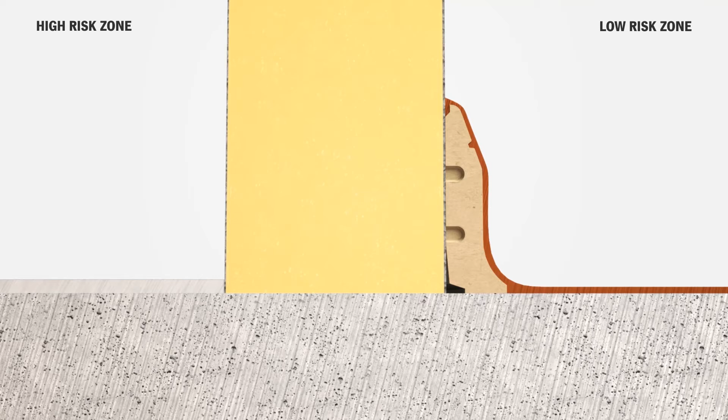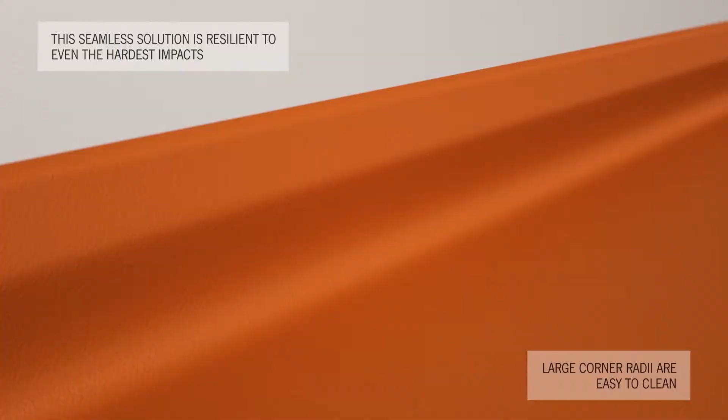Hi, I'm Jakub, and I am here today to tell you about our new product range of wall protection, ACO Kerbs. ACO Kerbs has three main functions: protects walls from impacts caused by machinery and other transport systems, eliminates water ingress into walls and leakage into other processing areas, and thanks to their curved design, prevents the accumulation of dirt and enables easy cleaning. ACO offers two versions of curbs: polymer concrete curbs and stainless steel curbs.

This is ACO polymer concrete kerb used with floor finish, and this is ACO kerb polymer concrete plain used with smooth gel coat. Floor finish and smooth gel coat create a uniform connection between the curb and the floor to ensure optimum hygienic conditions in accordance with EHEDG guidelines. These curbs can accommodate even the most complex room design. ACO kerb polymer concrete is the ideal solution for new build and refurbishment projects with resin flooring.

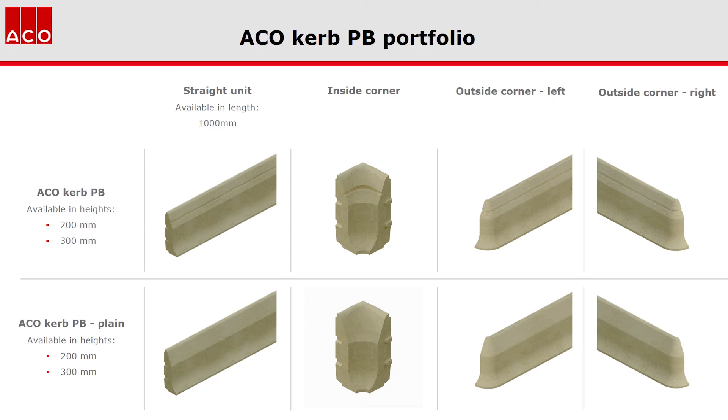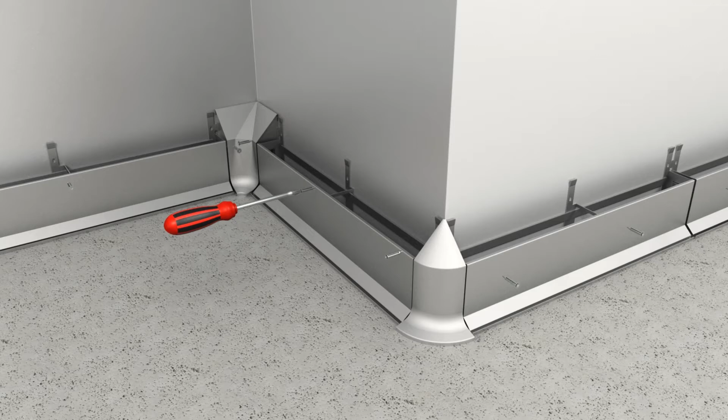The stainless steel variant of ACO kerbs can be designed to suit any building layout. It's made from 1.5 mm thick plate of stainless steel, which is welded on site to ensure the integrity of the whole curb system. Stainless steel curbs are filled with concrete, which makes it a very durable solution, resistant to the strongest impacts. Hygienic design is applied along the entire length of the curb, including internal and external corners, to create smooth corners which are easier to clean.

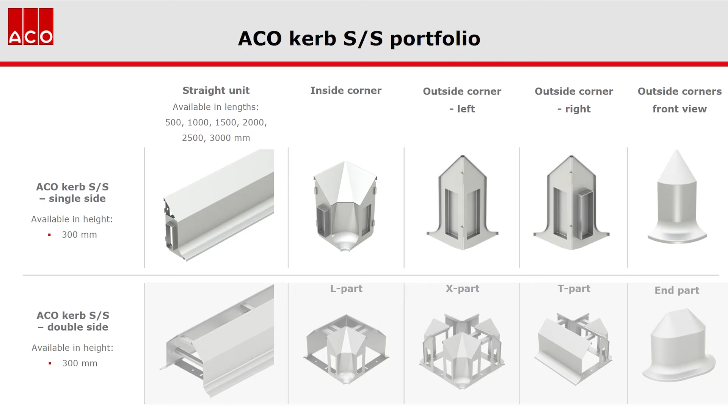ACO kerb single side is suitable for new build and refurbishment projects with resin or tiled flooring which require curbs to be installed onto an existing wall. ACO kerb double side is suitable just for new build projects with resin or tiled flooring. The wall is installed on top of the curb.

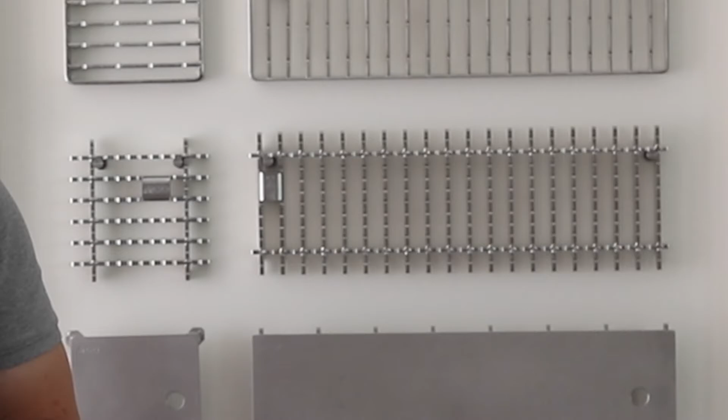Hi, my name is Stanislav Tekal, and I'm a product manager responsible for ACO industrial floor drainage. Today I'm talking about new additions to our gratings portfolio. The highlight is the new ACO frameless ladder grating. It's an exceptional solution which combines open-sided design together with high slip resistance. The open-sided design eliminates the accumulation of debris between drainage channels and grating frames. The top surface has a new design which provides slip resistance to classification R11 according to DIN 51130.

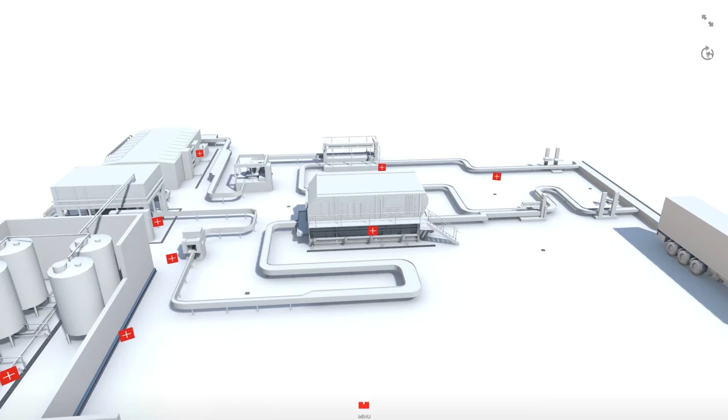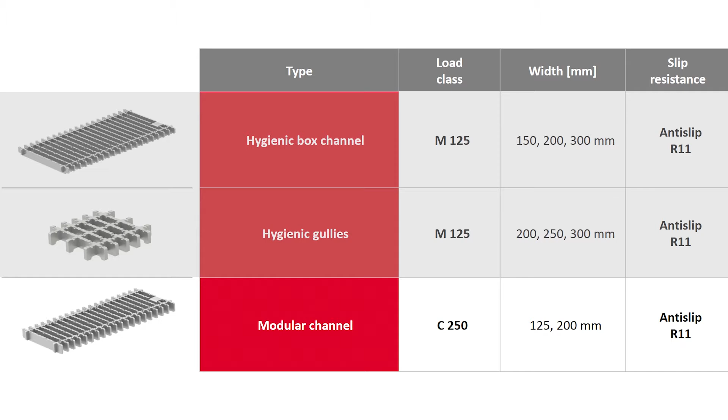Target applications include the beverage and dairy industries and production areas where glass shards may be present, and there is a risk of blockage occurring between the grating frame and the channel edge. The ACO frameless ladder grating allows solid waste to easily enter the drain and is a hygienic and easily cleanable grating solution. We offer widths up to 300mm with anti-slip R11 and load classes M125 according to EN 1253 and C250 according to EN 1433.

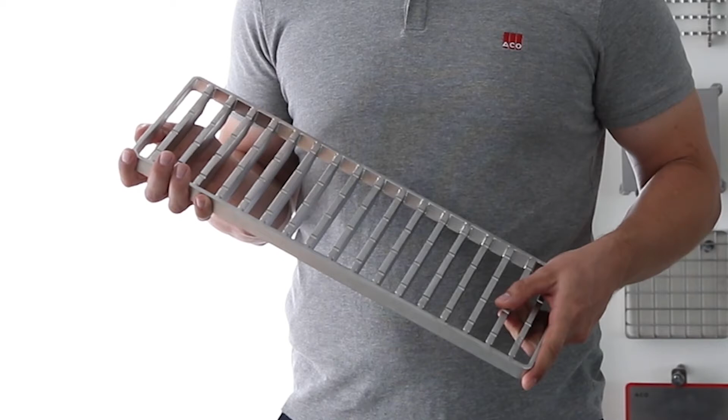Another addition to the ACO grating portfolio is the P400 ladder grating. It's designed for use in areas where heavy machinery is used, including industrial facilities, storage areas, and warehouses. It's also ideal for use in hygienic zones which experience occasional heavy traffic. For example, once a year the gearbox of a large mixer has to be changed, and a big forklift has to pass back and forth, which a standard grating design couldn't cope with. P400 is a durable and robust grating for hygienically designed channels up to 300mm width.

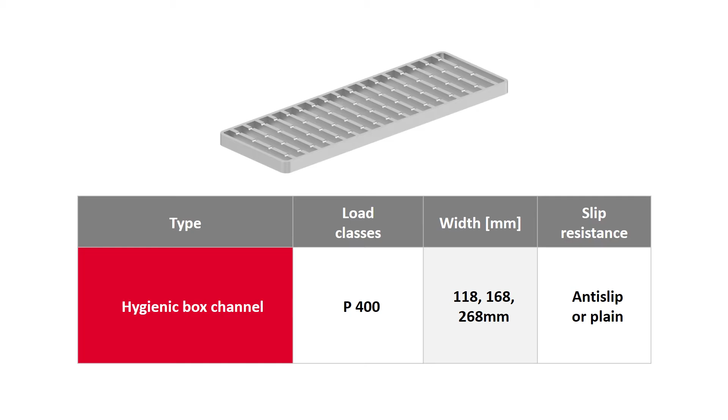P400 ladder grating is not on stock. It's available via ACO Configurator - see the standard article section of the gratings configurator. For detailed information, check our website acobuildingdrainage.com. Thank you for watching.

Thank you, Stanislav. I will kick off the questions with a question: can you please share with us the benefits that the ACO frameless grating has in comparison to the current cast stainless steel solution we have?

Well, maybe the first thing I would like to mention is that the frameless grating is really the flagship currently of our gratings portfolio. A lot of people would like to know what is the benefit over the cast grating. The biggest benefit is probably the surface roughness, because if you compare any cast grating with our frameless grating, it's much different because of the production technology. During casting, porosity is introduced, while if you use just the metal bars, you don't have such porosity, and it's dramatically different. So this is the basic difference and the biggest advantage.

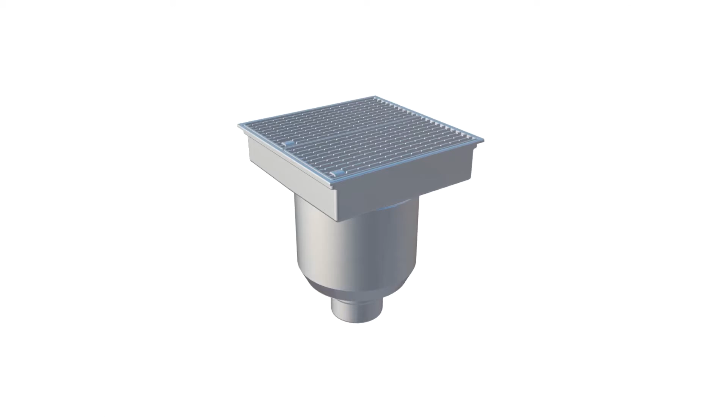Firstly, I'll talk about our new high-capacity gully. The new gully is designed to handle significantly higher flow rates than our existing product portfolio. This solution is perfect for use in breweries, soft drinks manufacturing facilities, and any application processing high volumes of water.

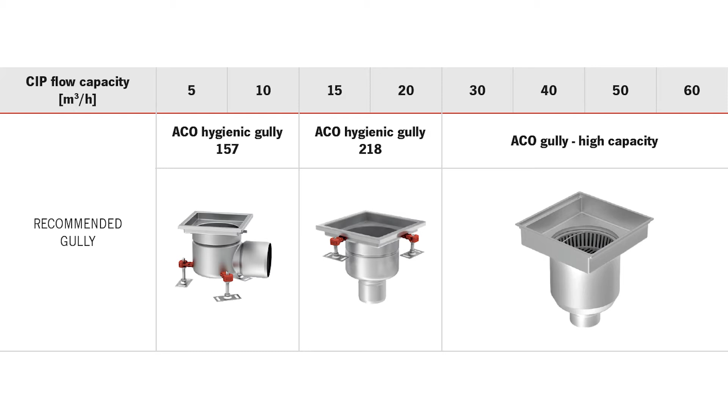High-capacity gully is designed and evaluated for flow rates higher than 20 cubic meters per hour, and it's designed in accordance with our hygienic design best practices.

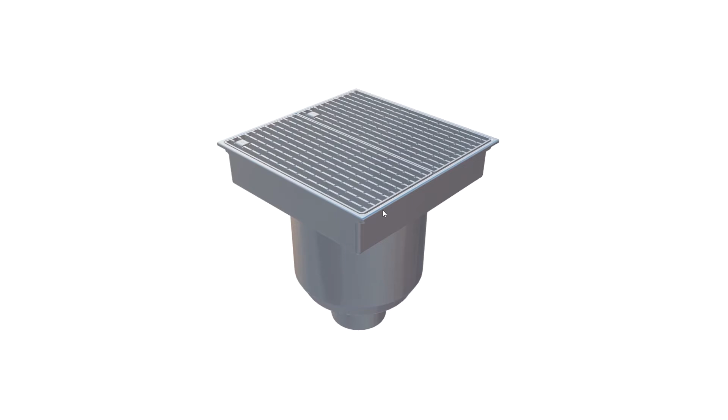In the ACO high-capacity gully range, standard items comprise a fixed height gully with a body diameter of 500 millimeters and a hygienically designed gully top 600 by 600 millimeters, 200 millimeter outlet pipe, and hygienic ladder grating R50.

The high-capacity gully can also be customized by varying the body height, changing the gully top or welded channel dimensions, and providing two different outlet pipe diameters.

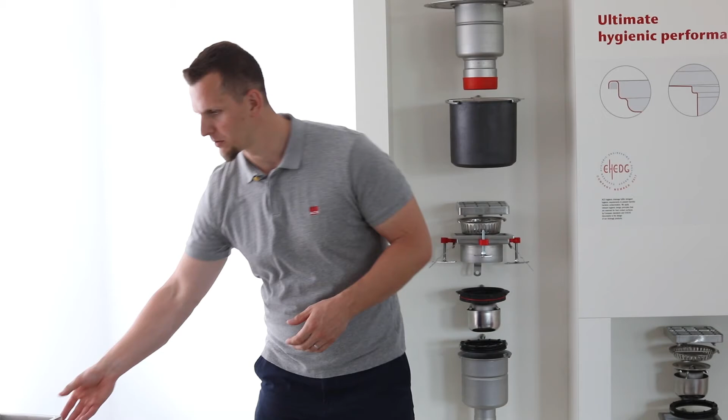Another project we are launching is an extended vertical edge, which is designed to enable floor tile installers to create a reliable connection between the drainage and floor tiles of 18 mm thickness.

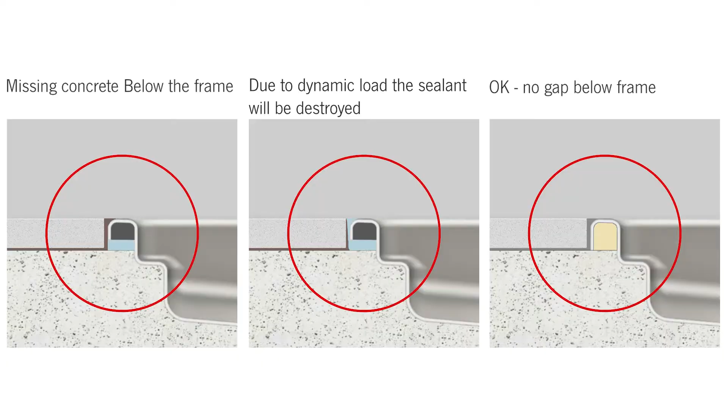Use of the new 20 mm vertical edge will enable easy channel and gully installation when thick floor tiles are specified. 18 mm tiles are often used by the beverage industry, some food processing applications, and by the pharmaceutical and chemical industries. Besides gullies, the extended vertical edge can also be provided for configured and customized box channels.

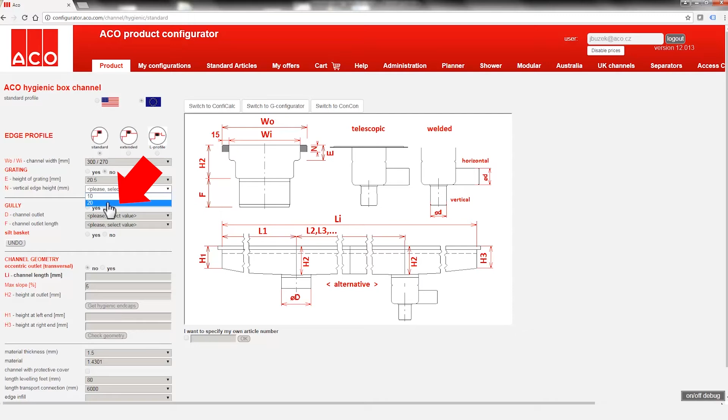Hygienic end caps for the box channels will be available in fourth quarter this year. With regard to gullies and gully tops, the basic set of standard items is now available.

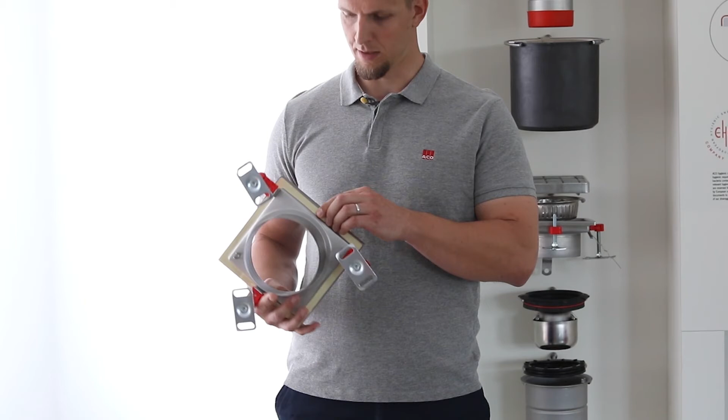Another solution for proper floor integration is polyurethane edge infill. This technology is often a must-have item for some customers for several reasons.

Firstly, polyurethane infill has higher impact resistance than rubber alternatives. It provides superior load resistance and is stable in long-term use. It also provides a safe and robust connection to the floor.

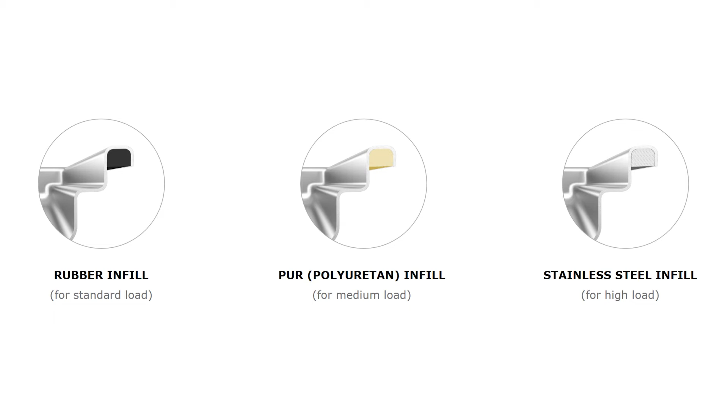This solution improves hygienic performance. The polyurethane infill perfectly fills every possible gap of the frame and so eliminates the possibility of bacteria harboring below the channel frame. Regarding availability, there are several stock items of

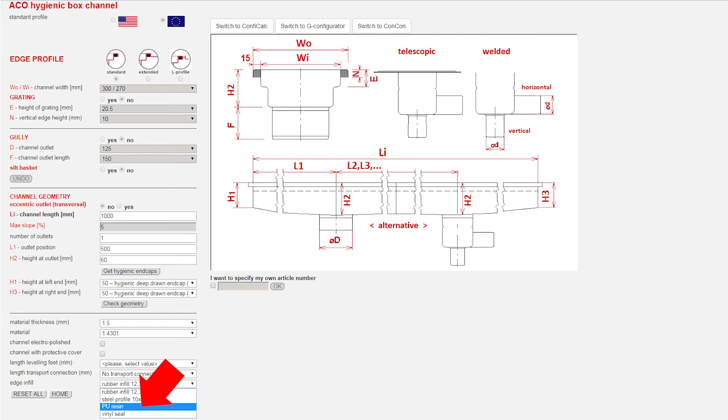gullies with polyurethane infill. The filling material is also available for configured and bespoke channels. For more detailed information, check our website acobuildingdrainage.com.

Thank you for watching.

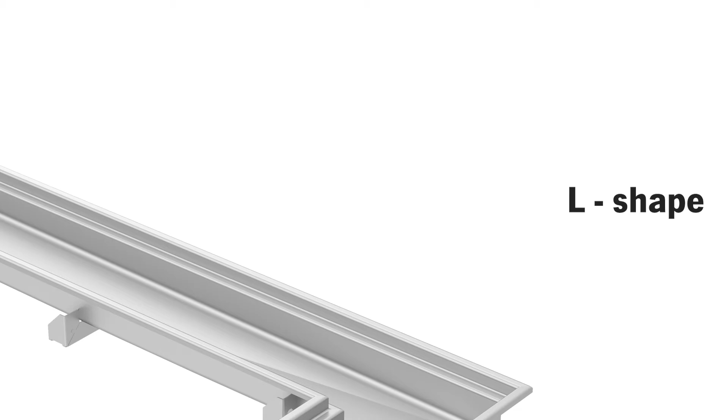We will move on to our next launch with Stanislav Tekal with the L and T shape sections for industrial channels. With this video, please. Today I'm talking about new additions to our ACO channel portfolio. First of all, I will talk about the ACO hygienic box channel L-shape and T-shape.

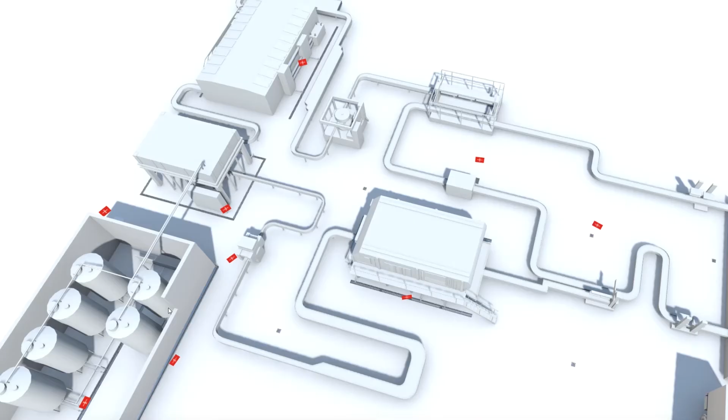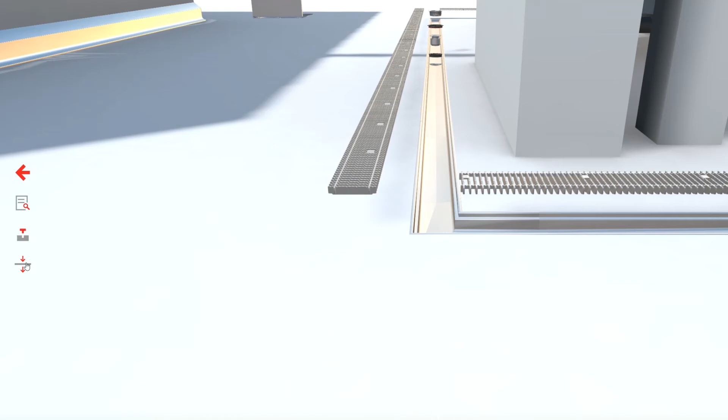This channel has both a transversal and longitudinal slope down its entire length, which means it can be completely and fully drained, eliminating the risk of any standing water remaining in the channel. No competitor provides a longitudinally sloped solution for this kind of layout. This channel is ideal for applications where there is a requirement to drain multiple pieces of machinery using one drainage line, for example, in the area around a bottle filler. The L shape is available for hygienic box channels with 200 and 300 millimeters.

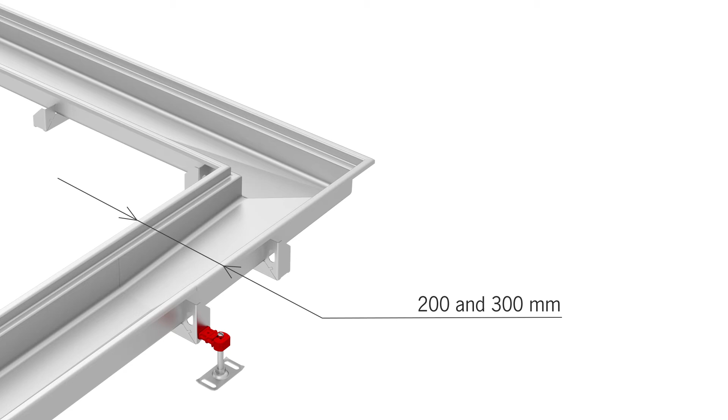The T shape is fully sloped, both the main and ancillary branch. Main branch widths are between 200 and 800 millimeters, and ancillary branch widths are between 200 and 300 millimeters. T and L shape channels are not stock items and are not available through ACO Configurator. Channels will be individually designed by ACO Industries customer service to meet complex and individual specification requirements.

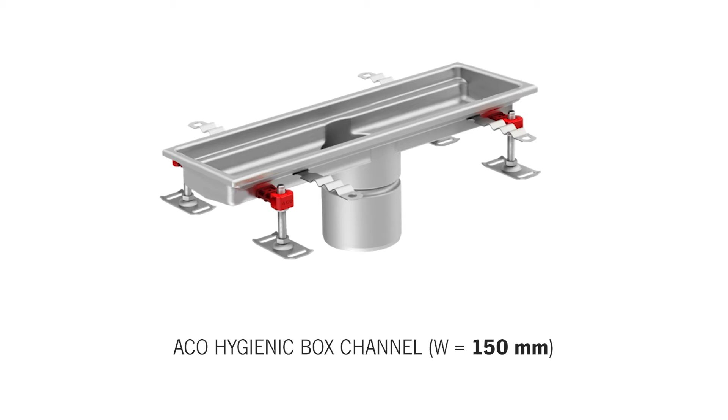Our next product introduction is narrow ACO hygienic box channel. With a width of 150 millimeters, the narrow variation of this channel is suitable for applications which use small amounts of water and where increased traffic is in place. These channels are designed to create a border between wet and dry or hygienic and non-hygienic areas and provide a cost-effective hygienic box channel and grating solution.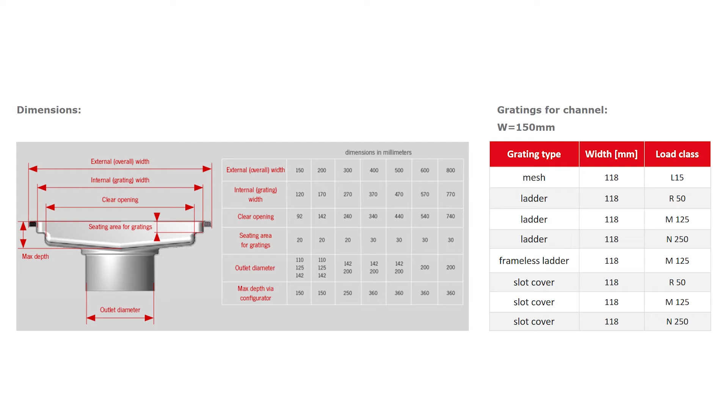In the very left column of product specification, you can find all the important technical parameters.

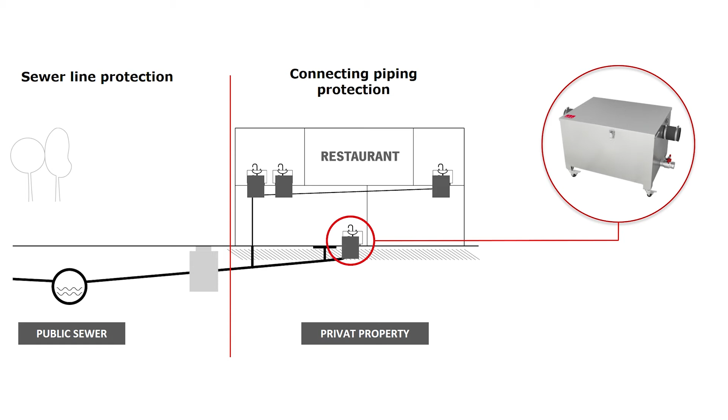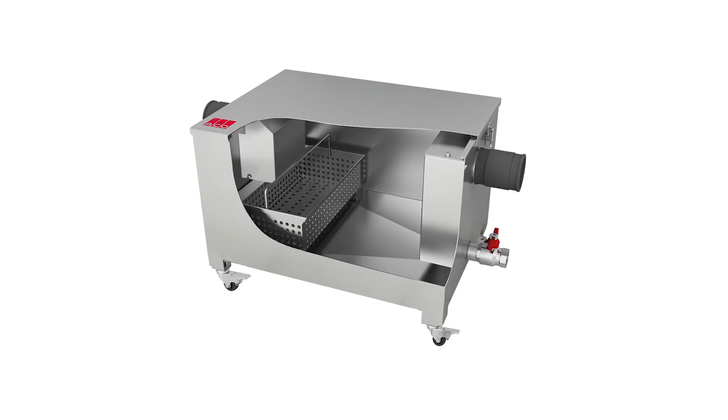Hi, my name is Zbigniew Sabiniok and I'm Product Portfolio Manager responsible for grease management. I'm here to introduce our new ACO grease trap AGT40. This product enlarges our grease management portfolio focused on building inner piping protection. It is designed for below-sink use in commercial kitchens and other food service establishments. Because we know that where food is prepared hygiene is in first place, we have made our AGT40 from stainless steel with as smooth a surface design as possible to guarantee cleanability and hygienic operation.

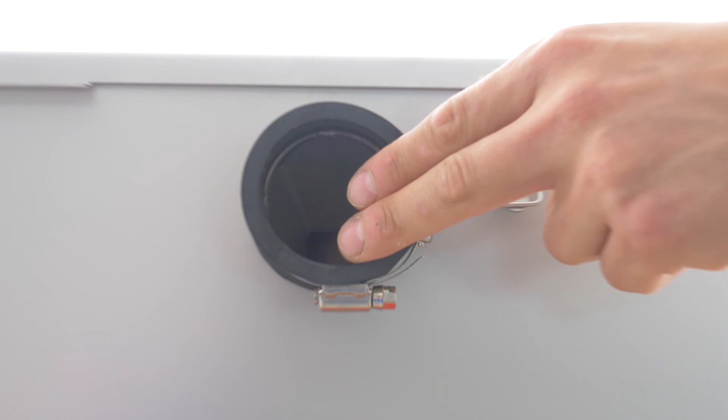Regular kitchen cleaning can be done also under the grease trap due to leveling feet or wheels. Inbuilt overflow protection at inlet ensures proper and safe functionality of the product without overflow threat in case of strong wastewater inflow. Maximum water flow is 0.6 liters per second.

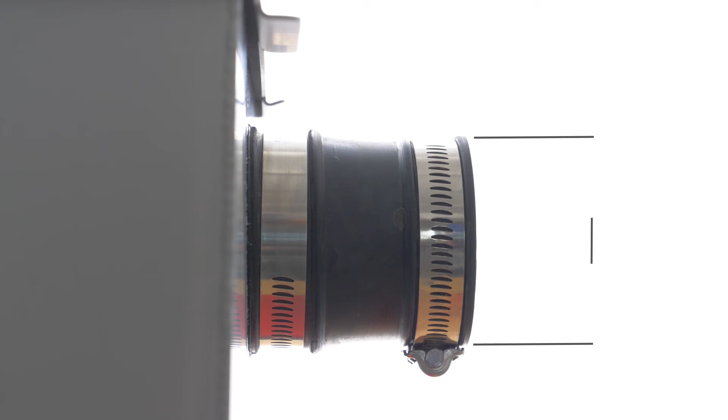To keep a hygienic and pleasant environment at the workplace is an important aspect of work with AGT40, therefore our odor proofness is ensured. Another important factor is to make installation as easy as possible for the customer. We know that connecting piping diameter may vary country to country, so we have decided to use flexible couplings at inlet and outlet. They are available in two versions, diameter 38 up to 50 mm or diameter 48 up to 60 mm. Because of this solution, the installation is easy, quick and can be used in every country around the world.

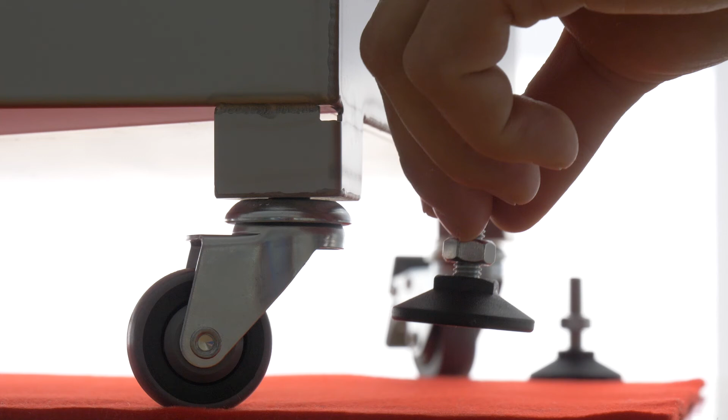AGT40 is available in two versions, stationary and mobile. Customer is choosing the version of the product based on the maintenance procedure he wants to use at the product workplace. Stationary, regular maintenance is proceeded at the place of product operation. Mobile, regular maintenance is proceeded out of the place of product operation. Wheels instead of leveling feet enable easy transportation of the grease trap.

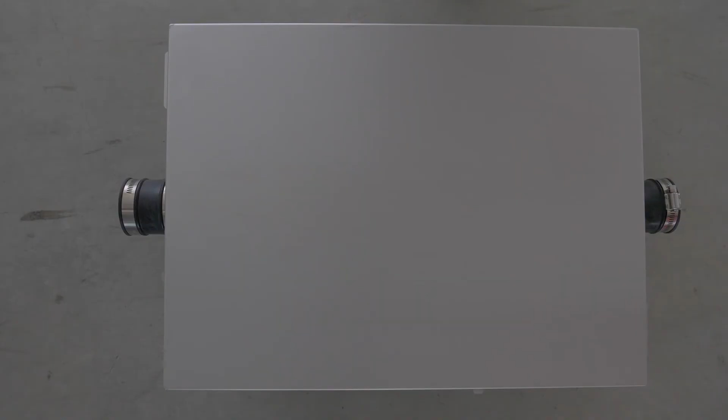Drain valve and slope bottom ensure a higher level of convenience during the maintenance procedure. At the final stage of cleaning, the content of the grease trap can be easily released with the help of the slope bottom and the drain valve. This solution is highly appreciated by the maintenance operators.

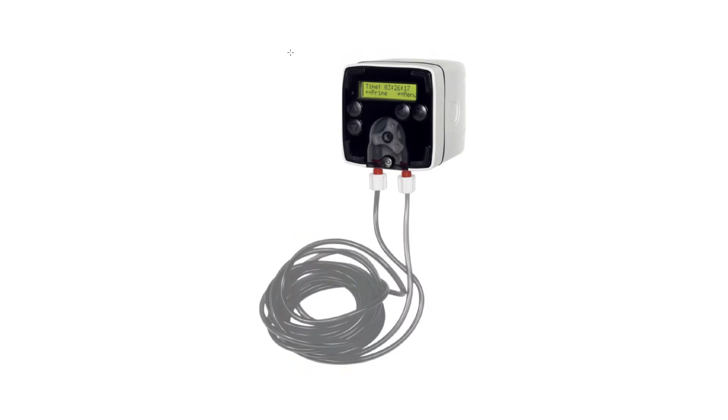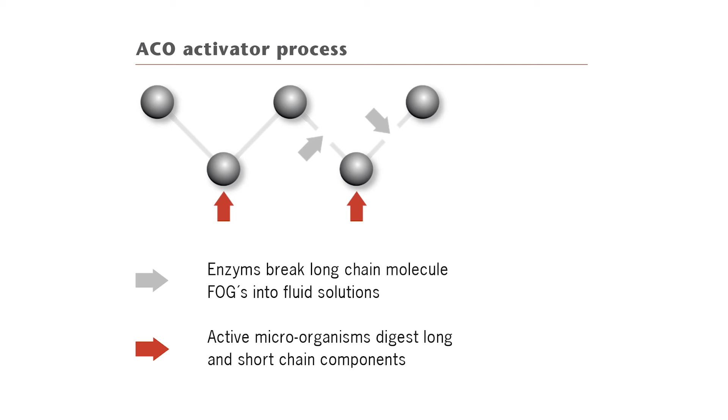AGT40 can be used alone as a standard gravity separator, but for optimum effectiveness, it should be used in combination with a biological dosing system. ACO biological activator works in two ways. The activator introduces enzymes that assist during the biological process of breaking down long molecular chains of fat, oil and grease into manageable solution. Secondly, the activator introduces other microorganisms that actively feed on grease in water.

As a next step, we prepared a configurator for access covers. So if you would like to configure the right cover for the right application, you can do it via the configurator. You can find there standard products, and you can also configure a non-standard dimension of the cover.

I want to ask you to test all our new tools and let us know your opinion or comments to help us improve them. We want to have tools which help you and your customers. You're always welcome to send us your references and share your experiences about our access covers. Thank you.

Thank you, Jan, for that real-time video, as it were. I will ask a quick question regarding your plans for this area of the portfolio. Yeah, so we want to prepare a new marketing brochure for the light-duty covers, and we also want to follow in everything for heavy-duty covers. It means the configurator and also the videos, installation videos and installation manuals. Thank you. Any questions from the audience here?